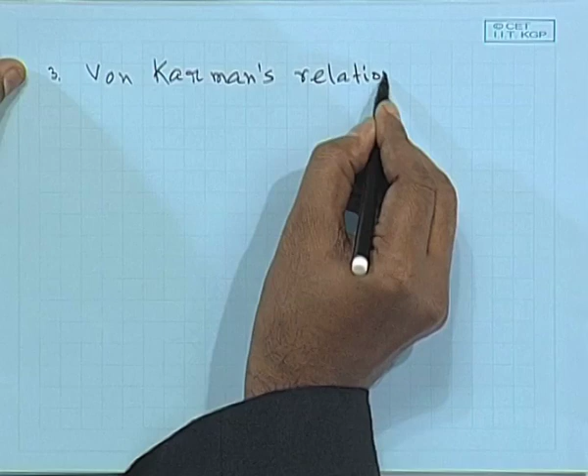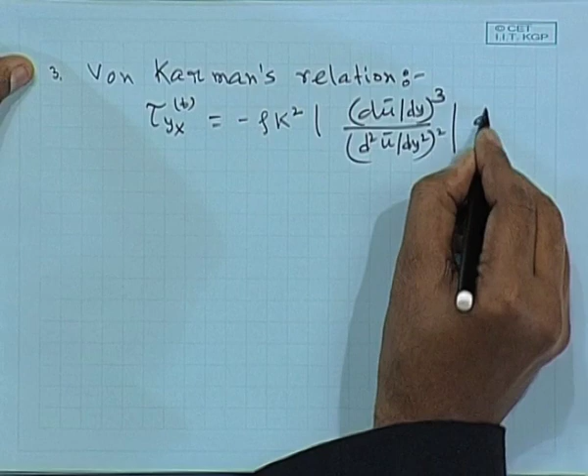The third is von Karman's hypothesis or relationship. It gives a relation between the turbulent stress, or Reynolds stress, and the gradient of velocity in a certain form, where k is an empirical constant ranging between 0.36 to 0.4.

Using this relationship, you get a certain velocity profile. If you compute this velocity profile and compare it with the other two, you get almost the same result.

There is one special relationship available for flow near the wall. Near the wall, the viscous terms are dominant, and turbulent eddies are negligible compared to them — this is called the viscous sublayer. Beyond the viscous sublayer, both terms become equally important. Beyond that, turbulent eddies predominate, and fluid particles in the core region do not realize the existence of the wall, meaning viscous forces are negligible in that turbulent core region.

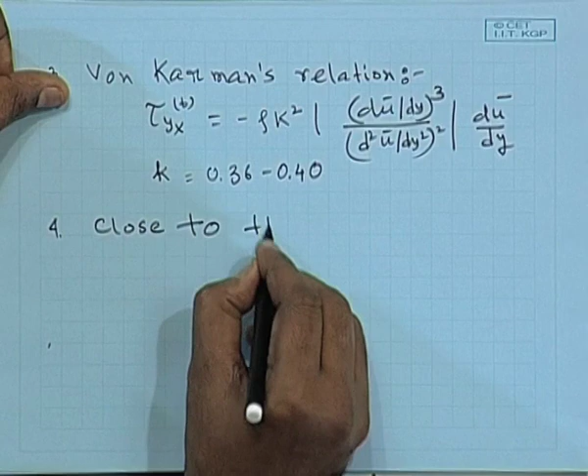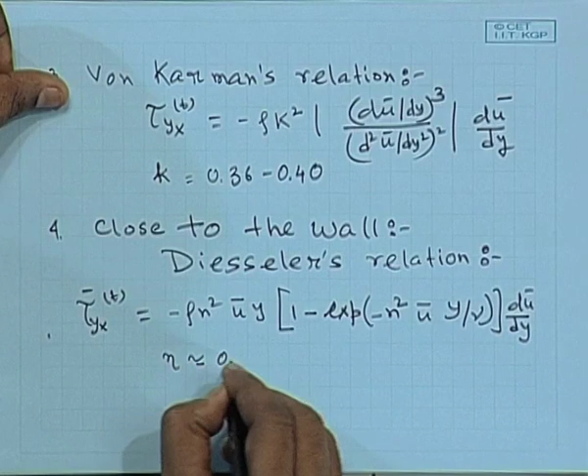So close to the wall, you get Deissler's relation. It is a bit complicated. This gives an empirical relationship between the shear turbulent stress term, or shear Reynolds stress term, with respect to velocity and the gradient of velocity.

Close to the wall, the value of y is pretty small, so the exponential of this term is very small, and you can use an exponential expansion very close to the wall. Beyond that, this term will still be there. Now, these four relationships of Reynolds stress with respect to velocity and its gradient can be inserted into the equation of motion to obtain the velocity profile.

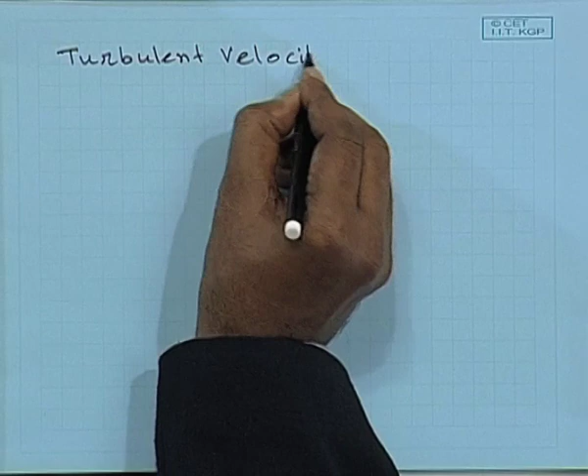Let us do one derivation for the turbulent velocity profile for flow through a tube. This will be given to you.

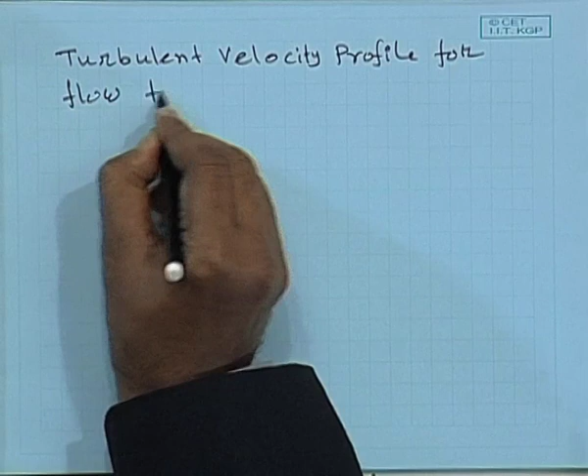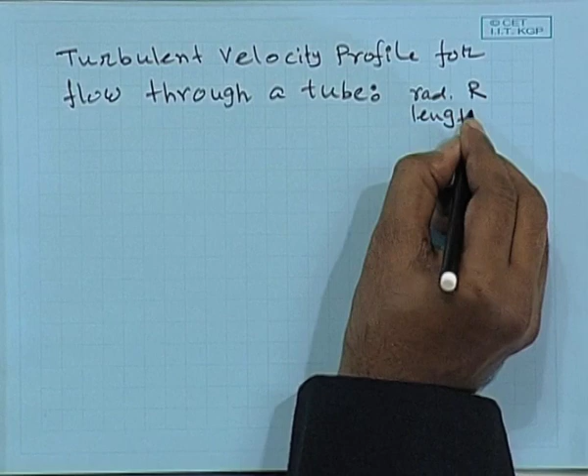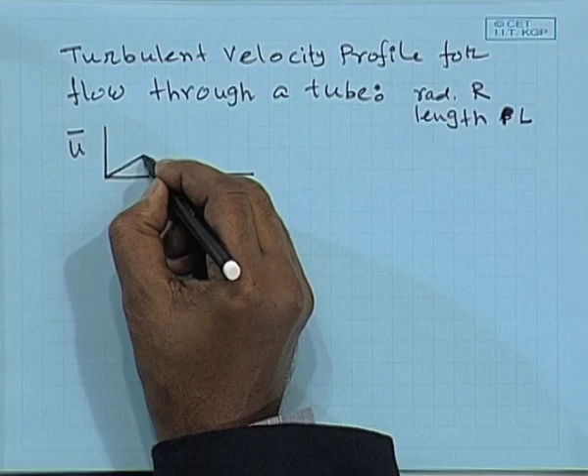We have seen that there is a distinct regime of velocity if you plot velocity with respect to distance from the wall, y. On a log scale, you get a certain relationship — close to the wall you get a linear relationship; this is the viscous sublayer.

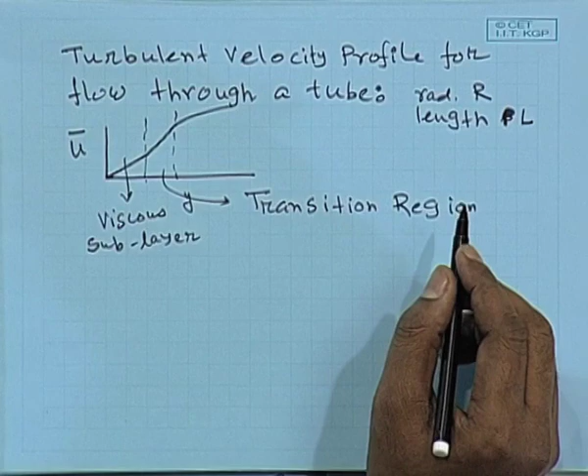Beyond the viscous sublayer, you get a transition region where both viscous terms and turbulent eddy terms are equally important, and in the turbulent core you get only the turbulent eddy terms, where viscous terms are negligible. This profile is known as the universal velocity profile.

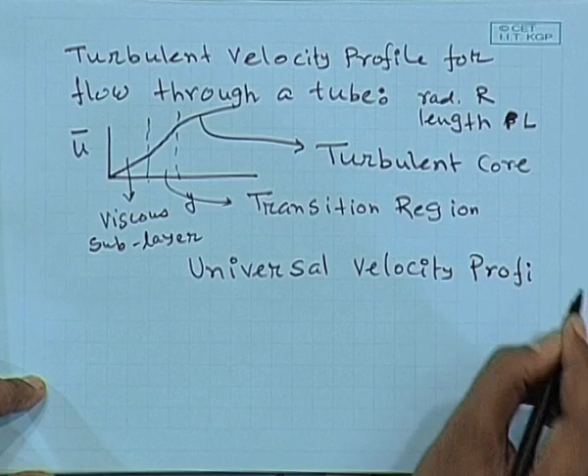Let us define our coordinate system from the wall. S is the distance from the wall, defined as capital R minus small r.

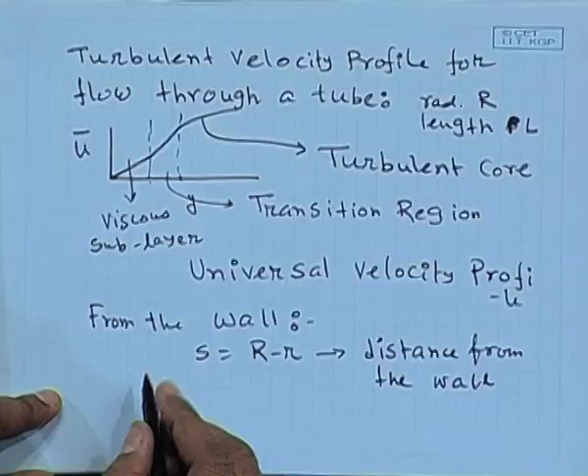Now we will derive this in the turbulent core. First we do this derivation for the turbulent core, where the turbulent eddy terms are really important. After that, we will do the derivation close to the wall using Deissler's relationship. For the turbulent core, we will use Prandtl's mixing length analogy — though you can use any other relationship.

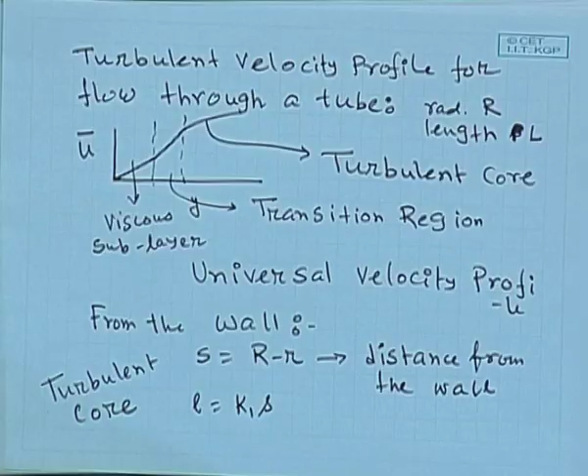Using Prandtl's mixing length analogy, the parameter L is k into y; in this case it becomes k into s, since y is the distance from the wall and we have defined s as the distance from the wall — so s is exactly equivalent to y in the Prandtl's analogy expression. Now let us write down the turbulent part, or the Reynolds stress part, of the shear stress obtained from Prandtl's analogy.

Now, this is the expression for the shear stress term using Prandtl's analogy. Now, convert R to S coordinate.

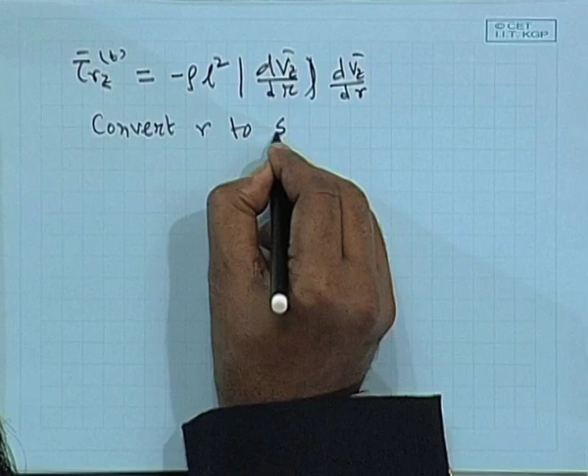If you do that, then the expression of shear stress that you will get is equation number 1. Tau Rz, the turbulent part, the Reynolds stress term, is equal to rho times k1 square, that is an empirical constant, multiplied by s square, distance from the wall, and time averaged derivative of time averaged velocity with respect to s.

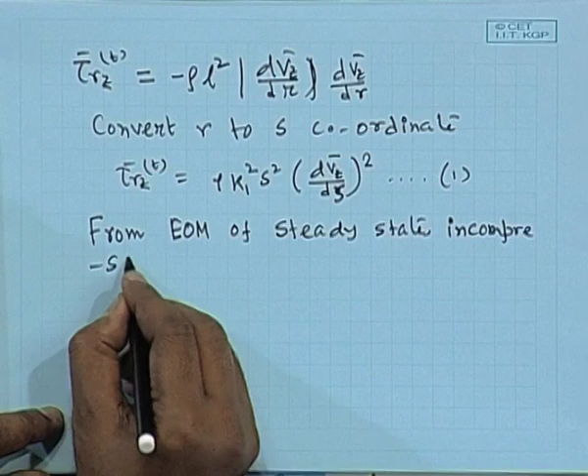From the equation of motion of steady state incompressible flow, if you solve that, the left hand side will be equal to 0, the inertial terms, delta p by L, that is p0 minus p at L divided by L, minus 1 over R d/dr of R tau Rz, the time averaged one. This will come directly from the equation of motion, and how to simplify the equation of motion we have seen enough examples in the last semester.

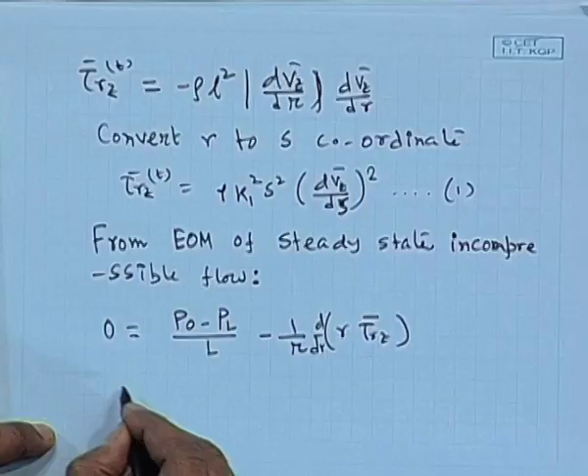Now, this tau Rz will be having two terms, two components. One corresponds to tau Rz for laminar, that will be mu times gradient of velocity, another will be tau Rz turbulent, corresponding to the turbulent term, and this turbulent term is basically the Reynolds stress term.

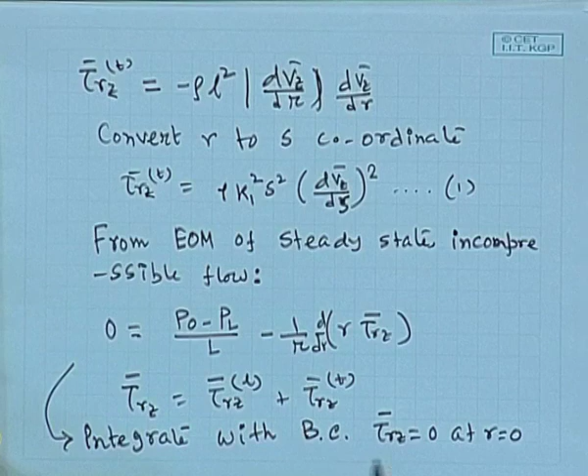Now, you can integrate this equation with the boundary condition that shear stress is equal to 0 at the mid of the channel. That is quite obvious, because at the middle of the channel the fluid particle will not realize the existence of the wall, so shear stress will be exactly equal to 0, and it will be maximum at the wall.

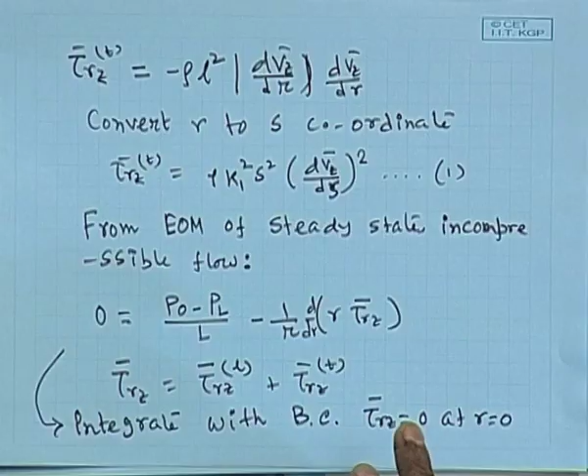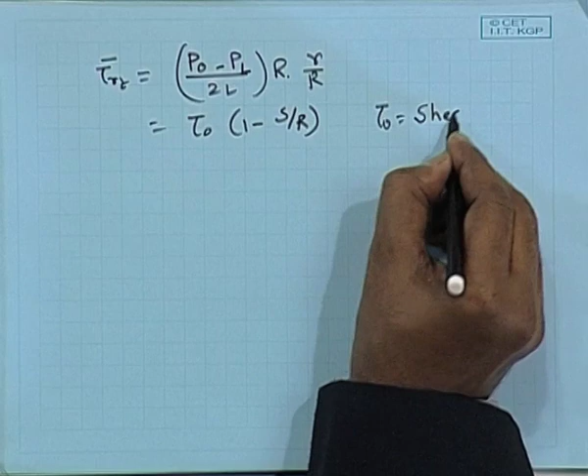So, after integration, what you get is tau Rz bar is equal to P0 minus PL by 2L times R. So, this will be tau 0 times (1 minus S bar over R). So, tau 0 is basically shear stress at the wall, at S equal to 0, and this will be equal to P0 minus PL times R divided by 2L.

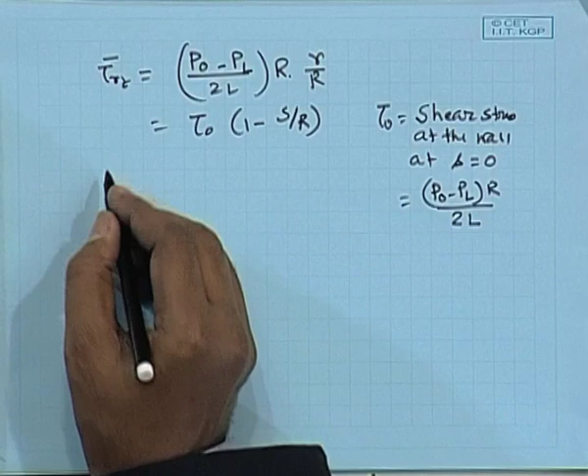Beyond that, both the viscous terms and the turbulent eddy terms will be equally important. From that point onwards, we can say that the turbulent core starts slightly beyond that. Typically, when the non-dimensional S is equal to 26, the turbulent core starts. If you compute what is the non-dimensional S equal to 26, that value will be coming probably 3 or 2 orders of magnitude less compared to the radius of the channel, radius of the tube. So, there is a gross approximation here.

The approximation is S by R is very small. In that case, the right hand side of this equation can be replaced by tau 0 only, assuming S by R is very small compared to 1. So, 1 minus S by R will be roughly equal to 1.

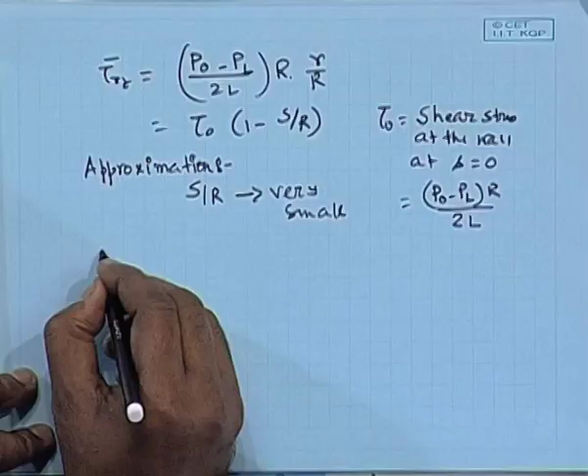So, the right hand side of this equation will be rho k1 square S square, dvz ds whole square, is equal to tau 0.

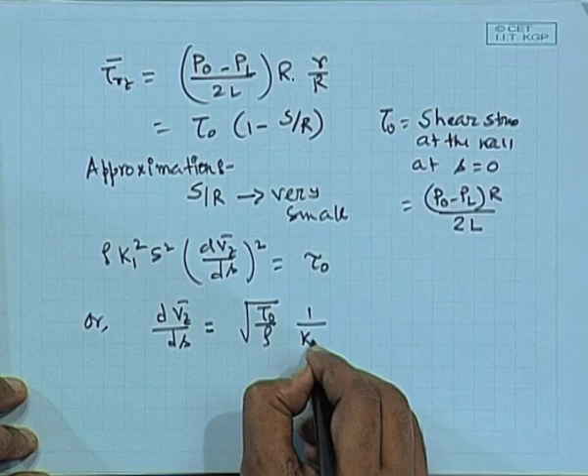Or you will be getting dvz bar ds is equal to... this v star has a significance, this is equal to under root tau 0 by rho, which has units of velocity. Since this tau 0 corresponds to the shear stress at the wall, this hypothetical velocity is known as the friction velocity. Friction means where the viscous forces dominate close to the wall, where the friction forces arise. So, this is known as the friction velocity.

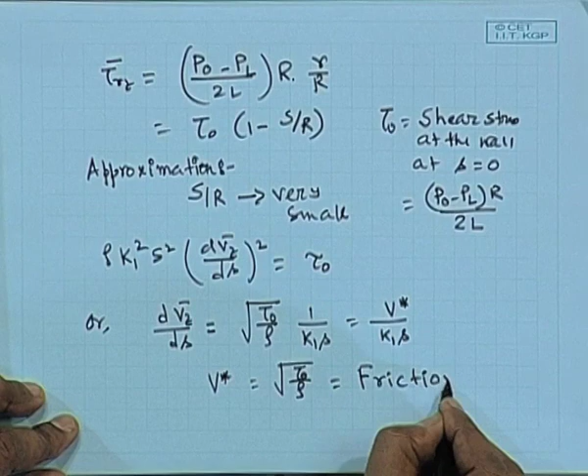Now, you can integrate this equation between some points, that is the edge of the buffer layer, or the buffer layer meaning the transition layer where both terms are equally important, because this whole analysis is valid for the turbulent core. The turbulent core starts from the buffer layer onwards to the center of the channel or center of the tube. So, you have to integrate this equation from the edge of the buffer layer to any location in the turbulent core. The integration should be between S1, which is the edge of the buffer layer, and S, any location in the turbulent core.

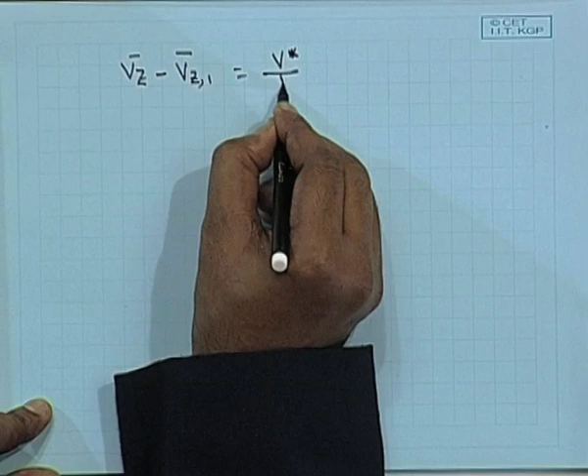So, you will get an expression: Vz is equal to Vz bar 1, that is the velocity at the edge of the buffer layer, which we do not know yet, plus V star, the friction velocity, divided by constant k1, times the logarithmic variation of the distance, ln s by s1.

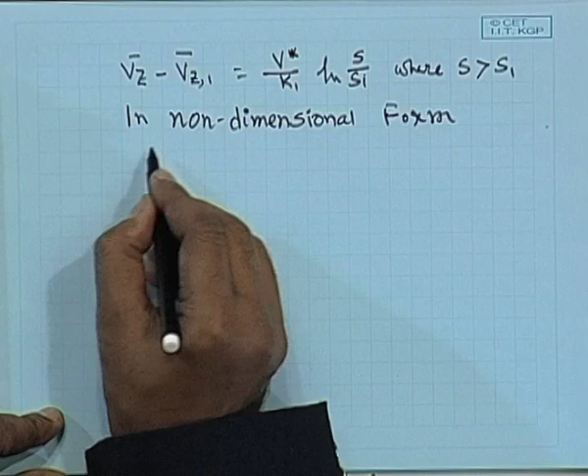Now, in non-dimensional form, the velocity profile looks something like this. We will be defining all the non-dimensional quantities, where the velocity is made non-dimensional with respect to the friction velocity, and distance is non-dimensionalized with respect to friction velocity times rho by mu. So, it is basically some kind of Reynolds number with respect to the friction velocity.

This one? Previous to that? The non-dimensional one: v plus is equal to the velocity non-dimensionalized against the friction velocity, so Vz bar divided by V star. And distance is non-dimensionalized. You cannot see this thing, should I make it a bit larger?

The S plus is equal to S times V star, the friction velocity, multiplied by rho by mu. So, it is basically your Reynolds number defined based on the friction velocity. Mu we take as a constant, that mu is basically the physical viscosity of the solution. It has nothing to do with the turbulent coefficient of viscosity.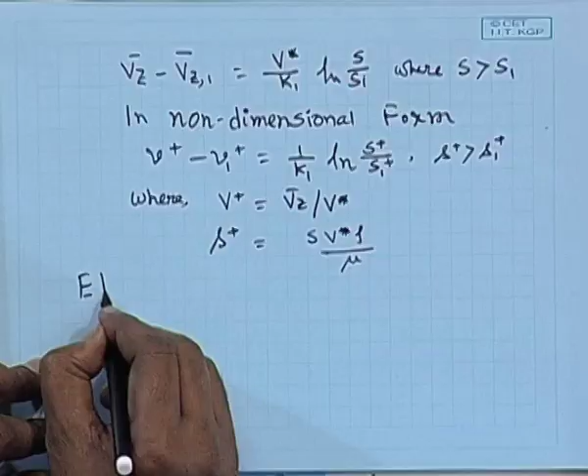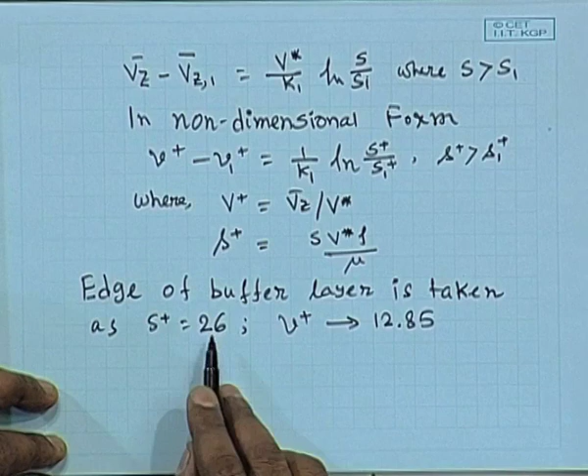As said earlier, from experiments, the edge of the buffer layer is taken as S plus equal to 26, and at that location the non-dimensional velocity becomes 12.85. These values come exactly from experiments. So, by putting these values, we get the velocity profile as 0.25 ln s plus 4, for s plus greater than 26, or equivalently 0.25 ln y plus 4, for y plus greater than 26. This y, the coordinate y, is exactly equivalent to coordinate s because it gives the distance from the wall. This is known as the logarithmic velocity profile.

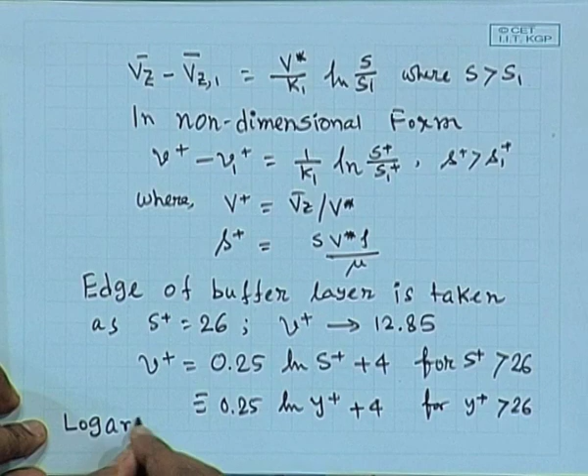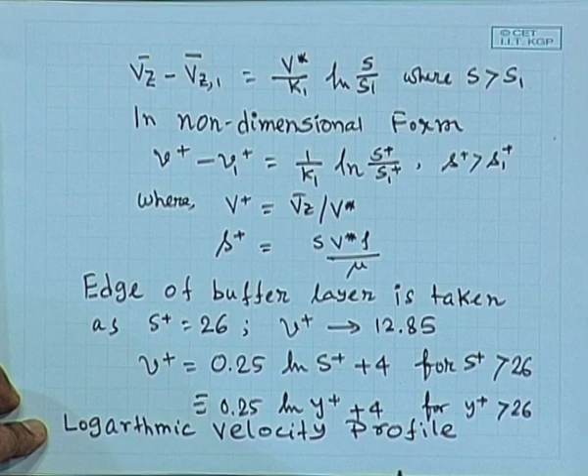After that, we will see how the velocity profile behaves, so the velocity profile will be logarithmic. Since all these parameters are empirically determined, the nature of the profile is important: how it varies with distance, whether it is quadratic, logarithmic, linear, or what. So, in the viscous sublayer, it will have some kind of variation close to the wall, which we will see next, and beyond that the velocity variation with respect to distance from the wall is logarithmic in nature, which is important.

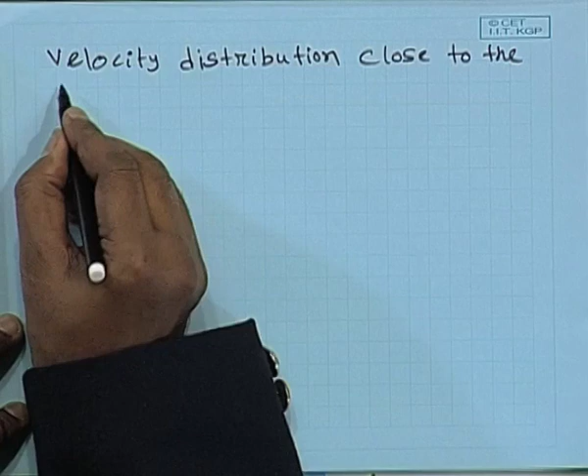Now, we will see the velocity distribution close to the wall. Near the wall, both the contribution of shear stress from the laminar and turbulent parts will be equally important. So, tau Rz bar will be equal to tau Rz corresponding to the laminar part plus tau Rz bar corresponding to the turbulent part, and you put in the expressions of the laminar and turbulent parts as well.

The turbulent, Reynolds shear stress close to the wall, we will be using the Deissler's expression because that expression is valid close to the wall. It is a complicated one.

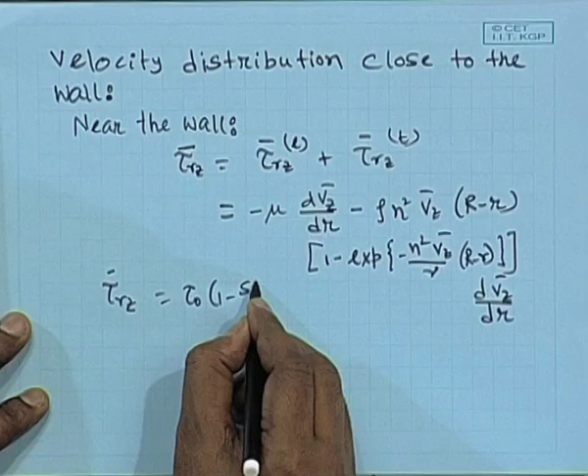And we already had that tau Rz total will be equal to tau 0 into 1 minus s by r, by solving the momentum balance equation of motion. Now, in this case, we can really approximate.

s by r is pretty small compared to 1. That means close to the wall, since s is the distance from the wall, close to the wall, the value of s will be really very small. And this is a very good approximation for this particular case close to the wall. Good and valid approximation.

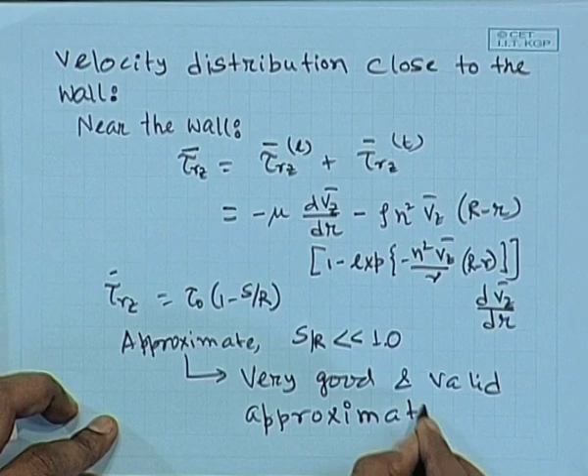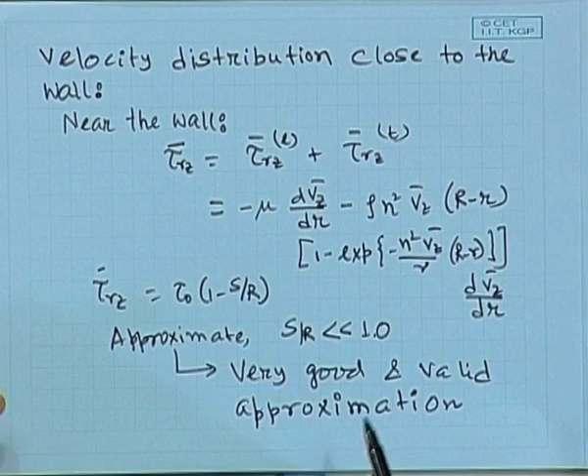So in this equation you replace tau Rz bar by tau 0 on the left hand side, and the right hand side you will be getting only one derivative, that is dv bar dr, and this can be integrated between the distance 0 to some s value, which will be basically edge of the buffer layer, and this non-dimensional s becomes 5 for the edge of the buffer, where the buffer layer starts at the end of the viscous sublayer. These values 5, 26, etc., which will roughly mean a demarcation of the different layers, are clearly obtained from the experimental results. That is why all these expressions and relations are semi-empirical in nature.

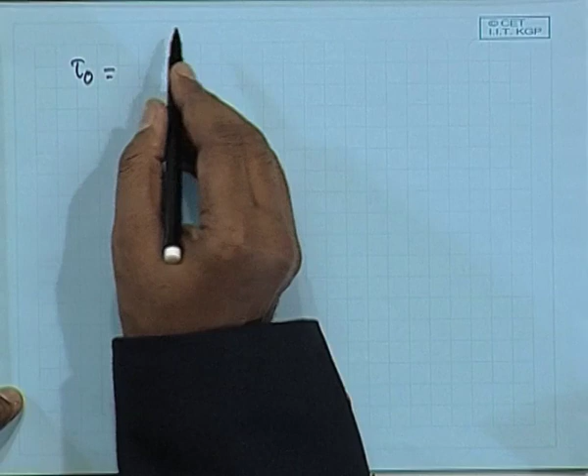So the resultant expression becomes tau 0 is equal to mu dv bar dr plus rho n square vz s, n square vz bar s by nu.

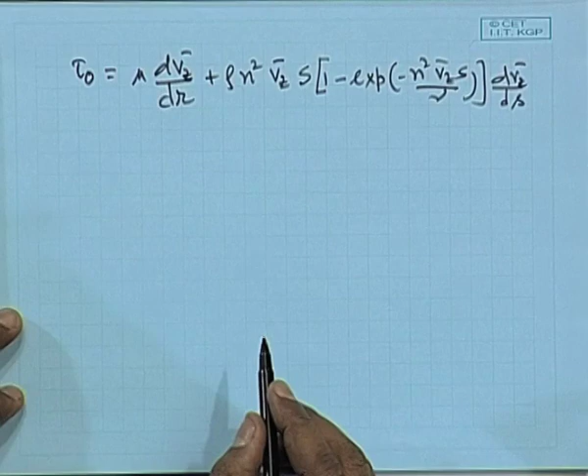You convert the r coordinate to s coordinate and you integrate between s, let us say from 0 to some s, let us say s2, okay. And in the non-dimensional form, this s2 is basically the distance, any distance within the viscous sublayer.

So you can integrate between the distance 0 to s2 plus, and you will be getting an expression of velocity profile within the viscous sublayer or within the buffer region.

Now, this s plus, you will see on the right hand side you will be estimating v plus on the left hand side by carrying out this integration, and on the right hand side you will be getting v plus again. So how will you carry out this integration?

This integration has to be carried out by trial and error, because you would like to find out what will be your point velocity within the viscous sublayer. That means you know the upper boundary of S2 plus between 0 to, let us say 0.1, and you would like to find out what is your velocity v plus at 0.1. So your upper limit is fixed.

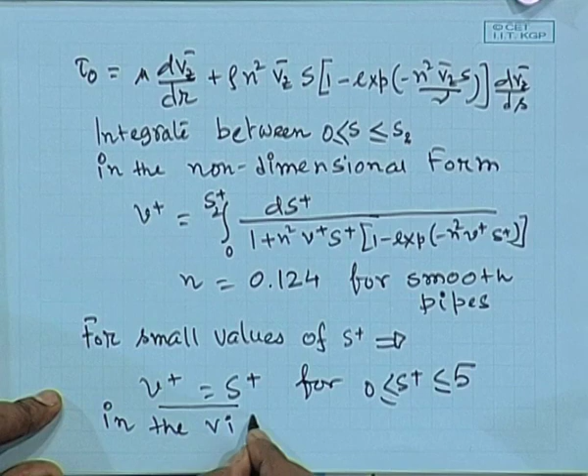If you look into this profile within the viscous sublayer, this part is really linear. You can approximate this part as linear. Later on, the nonlinear part starts.

Now, the proportionality constant, the constant of integration, will be obtained from experimental results, from Nikuradse's experimental results.

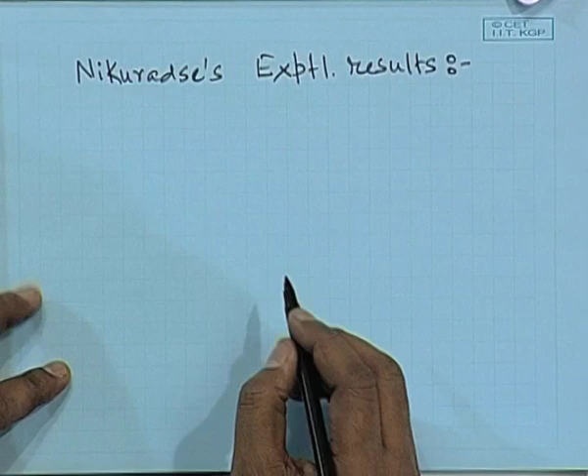You can evaluate the empirical constants and you will be getting the velocity profile as u plus is equal to y plus, for y plus lying between 0 to 5. It will be equal to 5 ln y plus minus 3, for y plus lying between 5 to 30.

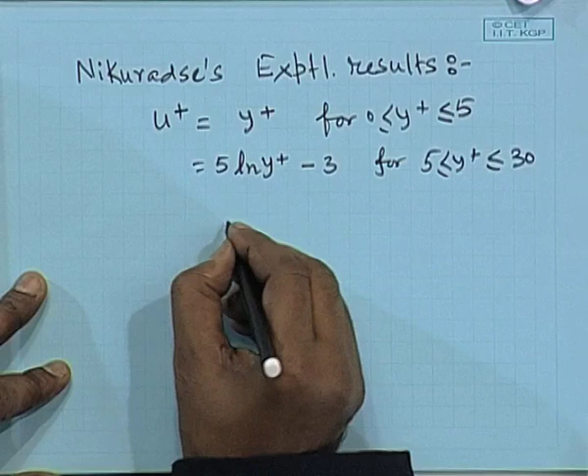For y plus greater than 30. In some books you will see that this turbulent core starts from y plus equal to 25. In other books you will find it starting from y plus equal to 30, or beyond. Actually, all these integration constants and values are obtained from experimental results, so experimental results vary from experiment to experiment. They will be roughly equal to 25 or 30, something like that.

But what is most important is the nature of the variation. Close to the wall, the variation is linear. Beyond that, the variation is logarithmic. That is the most important thing. So these three velocity profiles for the three regions in turbulent flow are known as the universal velocity profile.

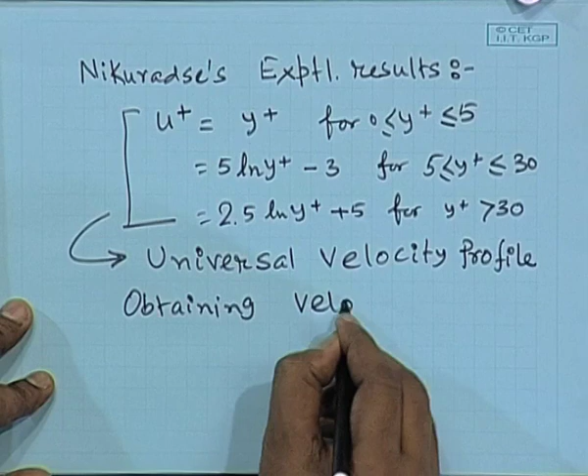Now, this completes our study of obtaining the velocity profile for a turbulent flow regime.

Now you will see the difference. If you plot the laminar velocity profile, it will be parabolic at the center, and velocity will be decreasing, dying down to equal to 0 to meet the no slip boundary condition at the walls.

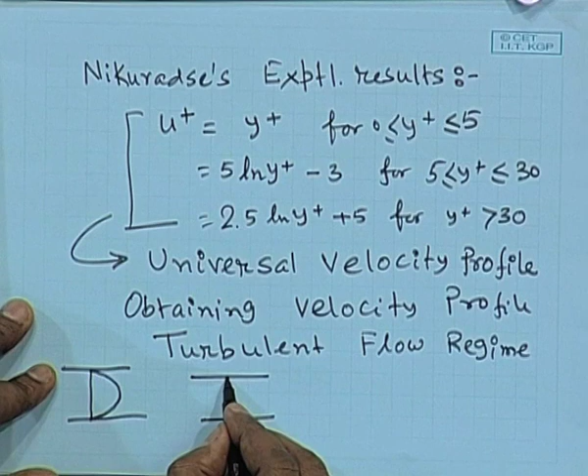Now for the turbulent core, for fully developed turbulent flow, you will be getting almost a linear variation very close to the wall, then the logarithmic variation, and in the linear scale it will look something like this, and then again close to the wall it will meet equal to 0 to satisfy the no slip boundary condition.

This is the fully developed turbulent velocity profile, and this is the laminar flow.

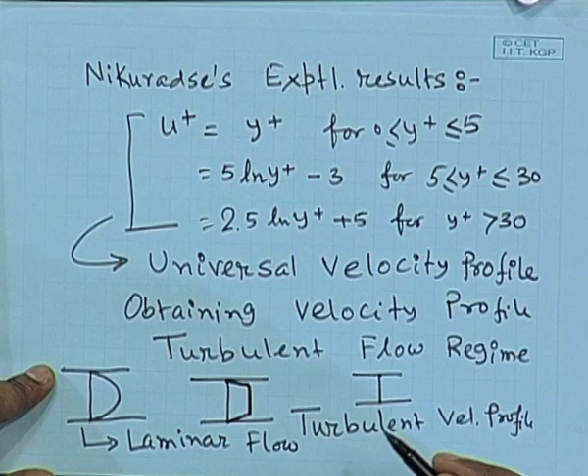And there is something called plug flow, where you can neglect the variation of the viscous sublayer, and the velocity profile will be as if it is uniform throughout. Like in the turbulent core, your velocity will be more or less uniform. Similarly, in plug flow, you can neglect the variation of the viscous sublayer.

Okay, that can happen if you are handling a highly viscous material. For highly viscous material, you can assume that it is almost like plug flow, meaning throughout the cross section of the channel or tube, you will be having the same velocity throughout, uniform velocity, with no variation.

For laminar flow, velocity will be maximum at the center and will die down to 0 at the walls throughout the cross section. For turbulent flow, velocity will be roughly equal across most of the channel, and close to the wall there will be a sharp variation dying down to 0 to meet the wall condition. But in plug flow, you can assume it is almost uniform velocity throughout the cross section.

That you can realize if you handle the flow of a highly viscous material, like toothpaste, something like that.

Now, once we get the velocity profile in the turbulent flow regime, in the same way you can define how we get the mass transfer concentration variation when talking about mass transfer in turbulent flow.

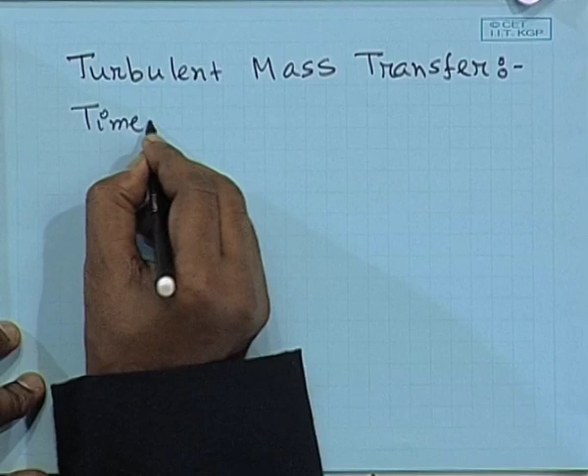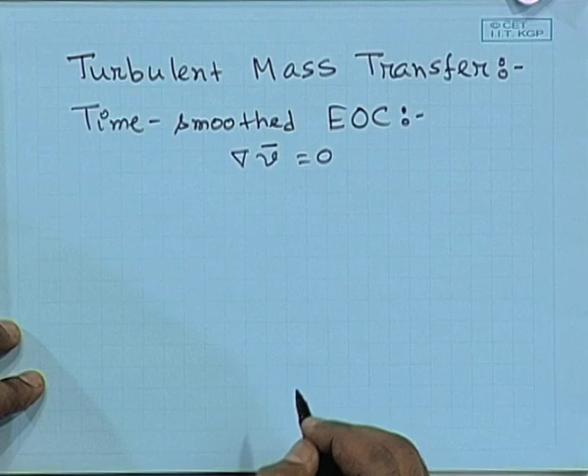You have to write the time smoothed equation of continuity, that is gradient of V bar will be equal to 0. You have to write down the equation of motion, all the time smooth quantities.

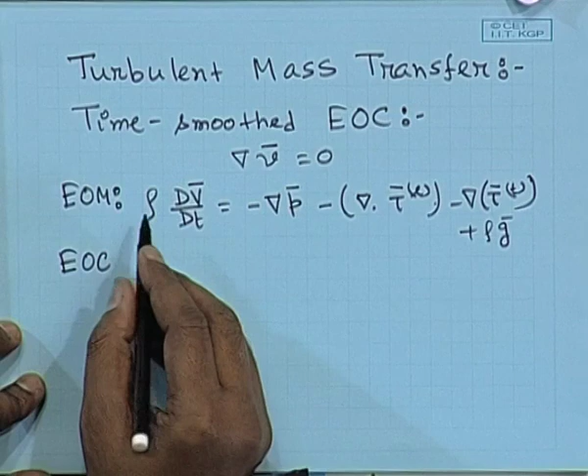So these will give you the equation of motion, this is the time smooth equation of continuity. I am just writing down all the equations when you will be having, apart from the flow hydrodynamics, you will be having a mass transfer regime. Equation of continuity for species A, that means it is basically component balance of species A under the flow condition.

You will be having the convective variation of concentration of species A on the left hand side, and on the right hand side you will be having the diffusive variation of concentration, like J bar laminar, it is basically the Fickian diffusivity. This is obtained from the Fick's law.

You will be having a corresponding term for the turbulent flow, the mass flux due to the turbulent flow, and there will be plus minus reactive terms, either plus or minus, depending if your component is generated by some reaction, then it will be a plus, it is a source term. If your component A is consumed in the reaction, then it will be a sink term in your equation.

Now, this DAB is diffusivity of species A in the solvent B. Now, this is basically physical property of the liquid, of the solute.

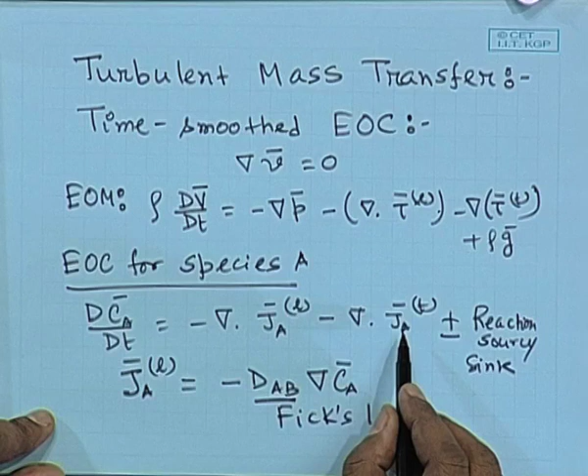Now, the mass flux corresponding to the turbulent term, turbulent flow or turbulent mass flux, again you cannot quantify them exactly from some concrete theoretical basis. There will be some correlations or empirical relations, those will be available, which will be relating it with a concentration gradient or velocity gradient or both. Those will be inserted in the equation and you will be getting the corresponding concentration profile.

Now, let us look into some of these empirical equations. The first one is eddy diffusivity. This is analogous to Fick's law.

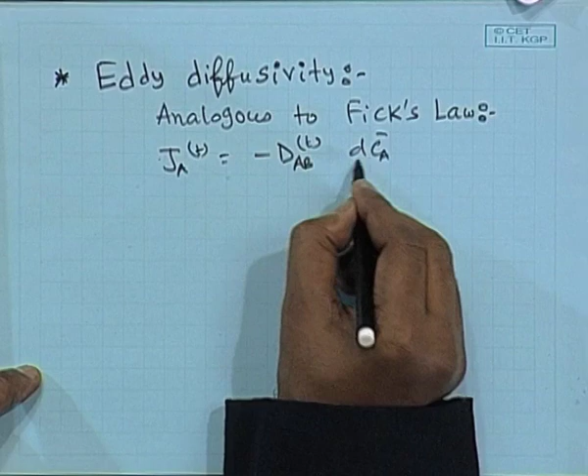This is known as the turbulent diffusivity or eddy diffusivity. This will be like the Fickian diffusivity. Fickian diffusivity is basically physical property of the system, of the solute, but this will vary with the location. This will vary with the concentration. This will be varying with the basically location, right?

So these are basically an empirical constant which will be fitted to the experimental results, and the value of this diffusivity will be at least 3 to 5 order magnitude higher compared to the Fickian diffusion. That is why you will be getting higher mass flux in case of the turbulent flow.

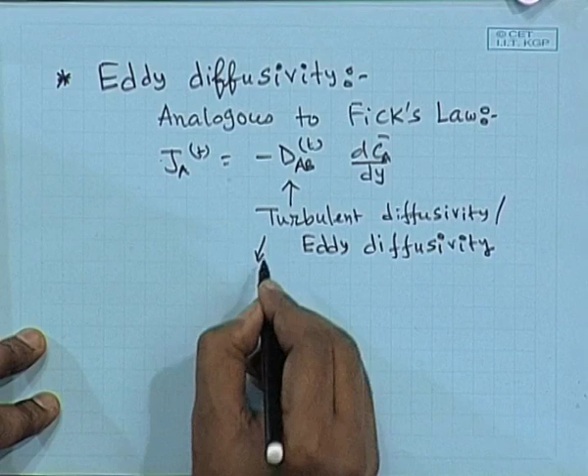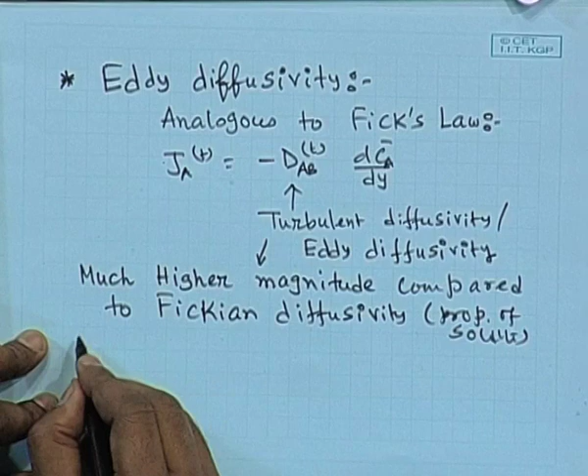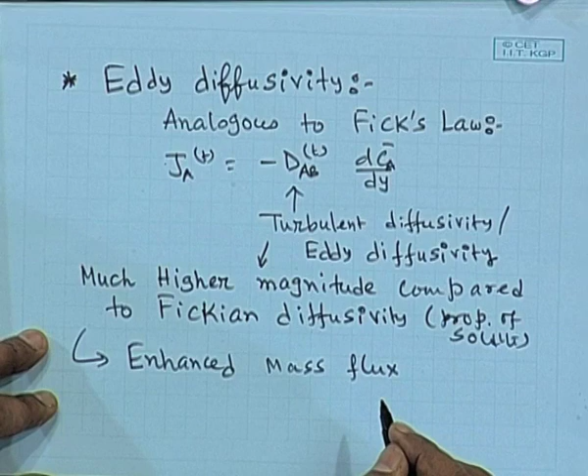Much higher magnitude compared to Fickian diffusivity, which will be basically the property of solute. So you will be getting an enhanced mass flux, or enhanced transport of species A under turbulent flow conditions.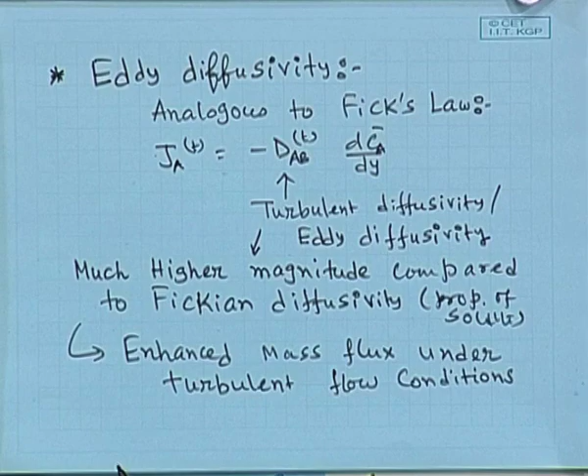The second relationship of turbulent mass flux is Prandtl's mixing length. So again you will be having basically different types of empirical relations for the turbulent mass flux. This one is like the kinematic viscosity corresponding to the Eddy terms previously. So you will be having the expression that you will be obtaining from Prandtl's mixing length. You will be having expression of the turbulent mass flux corresponding to von Karman's relationship, and of course Deissler's relationship.

Depending on the application, whether you are computing your mass flux close to the wall or away from the wall, or in the turbulent center of the pipe, you will be using the appropriate relationship, integrate if possible analytically, if not do it numerically, and you will be getting the concentration profile.

And remember, in order to obtain the concentration profile, it is coupled with the velocity profile, because the convective terms are there. So you have to solve first the velocity field and take the help of the solution of the velocity field, insert the expression of the velocity in your equation and obtain the concentration field. Similar for the temperature field.

In order to obtain the concentration field, you have to write down n minus 1 number of species balance equations. The last one will come from the overall mass balance, but for the temperature, in order to get the temperature variation, you have to solve only one equation, that is the energy equation.

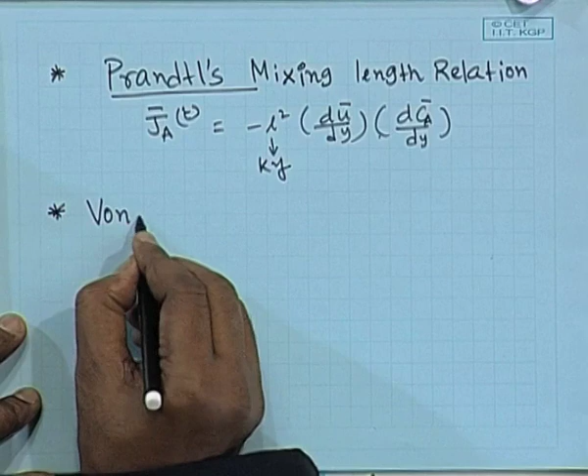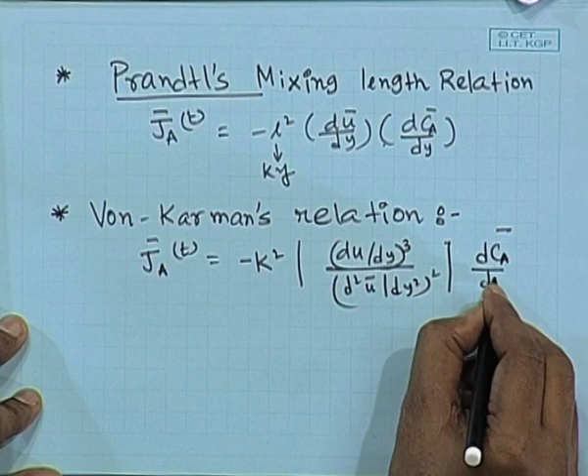The third one is von Karman's relation. The turbulent part will be minus k square. This part will be related to the velocity field. Again, this k is an empirical constant, roughly equal to 0.4, and you will be having Deissler's relation.

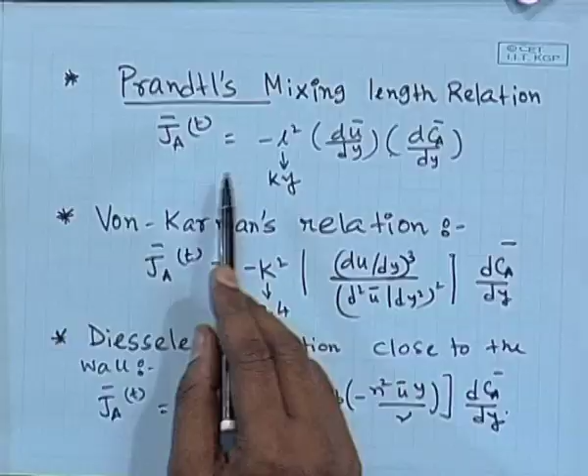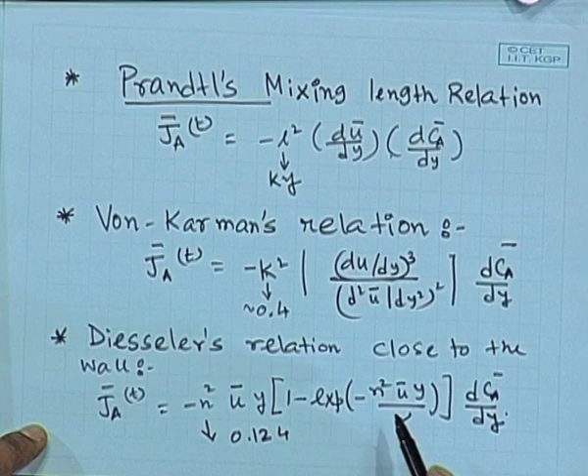But the other equations like Prandtl's mixing length etc., these numerical constants, empirical constants, are already known. This n equal to 0.124, this k is roughly 0.4 in von Karman's or in Prandtl's mixing length analogy, and in Deissler's relation this n equal to 0.124. All the other quantities are known, either they are independent variables or dependent variables. So it is easier to use them in order to get the concentration field.

This is the time averaged one.

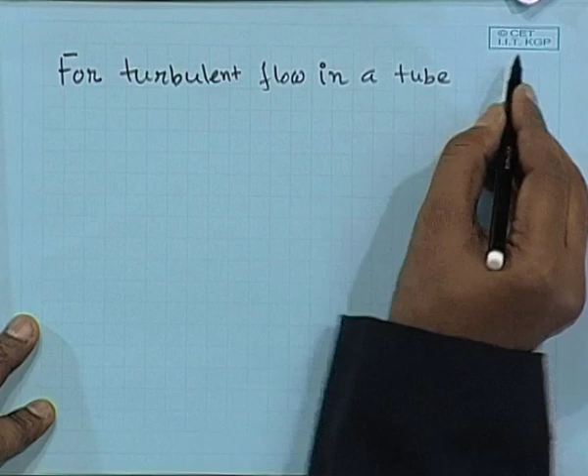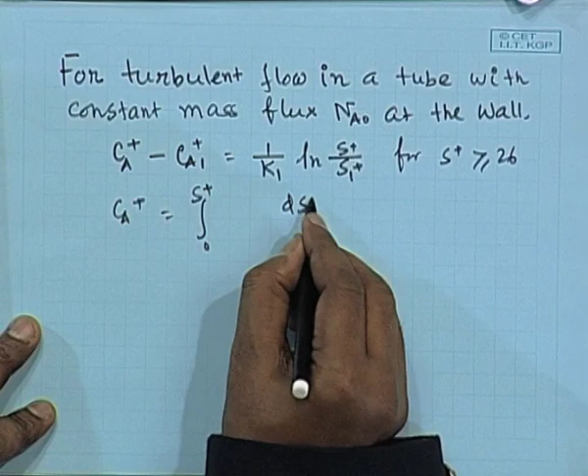Now I will give an expression for turbulent flow in a tube with constant mass flux at the wall. The profile becomes Ca plus minus Ca1 plus equal to 1 by K1 ln S plus by S1 plus, for S plus greater than 26, and Ca plus equal to the integral from 0 to S plus of dS plus over 1 over Schmidt number.

Now we can take the same kind of analysis as previously and obtain the concentration field. This will be in the turbulent core beyond the viscous sublayer, and this includes the viscous sublayer as well as the buffer region. For the viscous sublayer,

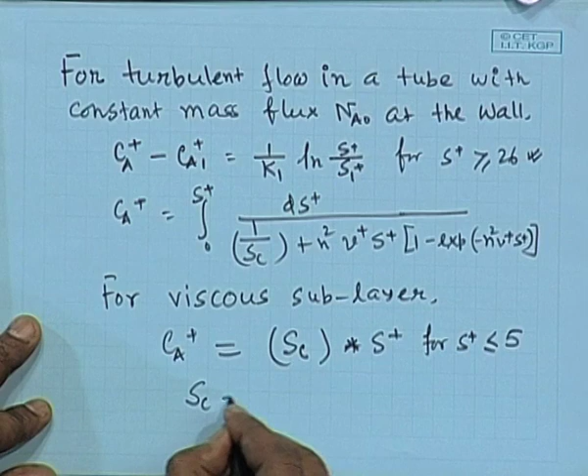Ca plus, the non-dimensional concentration, becomes Schmidt number multiplied by S plus, for S plus less than or equal to 5. Schmidt is a dimensionless number, known as Schmidt number, equal to mu by rho DAB, and DAB is basically the molecular diffusivity, which is the property of the solute. This molecular diffusivity is a physical property of the solute.

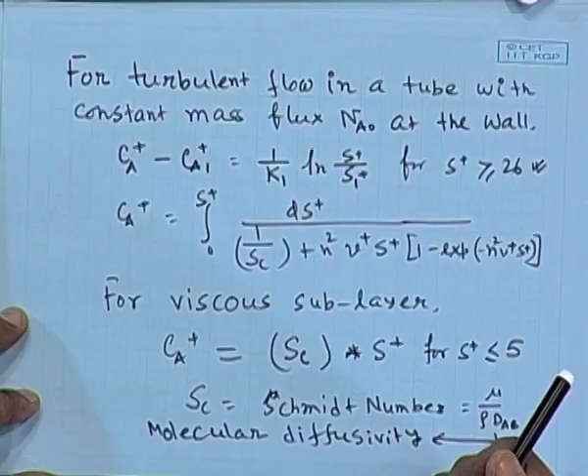Now we will be doing the derivation for the energy equation as well, either in this class or starting in this class, and after completing all the turbulent flow basic materials - how to get the velocity field, how to get the concentration field, how to obtain the temperature field - we will be solving a couple of problems using different types of relationships and how to use these relationships in order to get the velocity field, concentration field, or temperature field.

So after that we will be completing the equations, and probably in the next class, in tomorrow's class, we will be doing the energy equation and how the energy equation will be simplified in order to obtain the temperature field.

In tomorrow's class only, most probably we will be having time in order to solve a couple of problems. I will be solving one problem that I had given in the last year's mid-sem or end-sem, I do not remember, using different types of analogies. Basically, whatever we have done in this class, all these universal velocity profiles, these logarithmic profiles, are obtained if you use Prandtl's analogy. But if you use von Karman's analogy or the other analogies, how the expression will look like must be known to you.

And if you compute taking 2 or 3 empirical relationships and then compute numerically, you will see you will be getting almost close velocity profiles, concentration profiles, or temperature profiles. So you can use any one of these 4 relations that we have discussed so far.